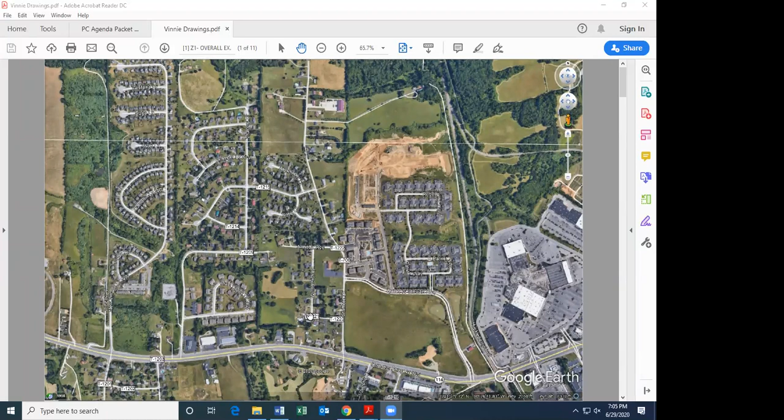What we have proposed is approximately 18 proposed lots that would be built as patio homes. Those are single story, single level living. Will, would you move to the next slide, please?

We'll move to the layout here in just a minute, a little bit better blow up of the site. Again you see the property here outlined in black, basically one gut of property off of Pepper's Ferry Road. Access on Vinnie is off of Stafford to the Carmel Heights subdivision and off of Walters Drive here to get into Slate Creek.

Next slide, please. This is just an existing condition, a little hard to see on the plan here, but this is a survey that we did for the applicants. Again there's Vinnie on the Slate Creek side, on the Carmel Heights side. You see there's an existing sanitary sewer line that runs through the property right here, comes down, jogs off on property right here. Drainage - currently the site kind of forms a bowl and flows in a northwesterly direction.

It's hard to see on this map, and I'll show you a better plat in a few slides, but there was a 50-foot access, ingress egress easement that was dedicated to the town of Christiansburg that connected the right of way on Vinnie here to the right of way here. You can see it noted.

There we go, right there. That was dedicated, I believe, in 2012, when some lots north of this that were owned by the current property owners were subdivided.

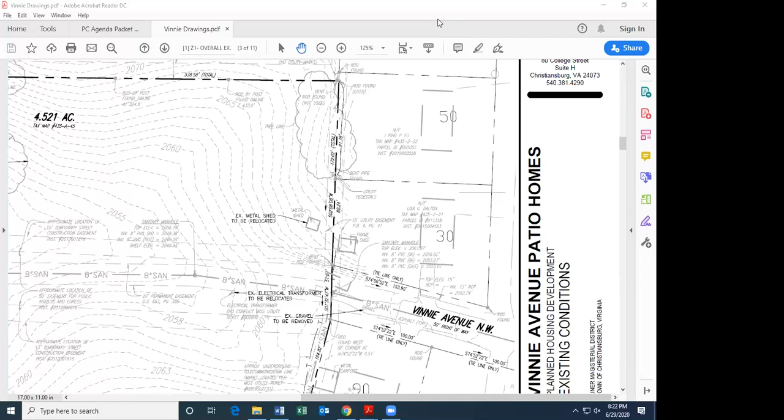And would you mind, Mr. Johnson, could you scroll through a couple more slides? I think it might be helpful for the commission to see. These are some of the building plans we've done for Wynwood, but we don't have to go through those — you guys have pictures of what the units look like built. The pictures are a lot prettier than our plans anyway. Maybe one more.

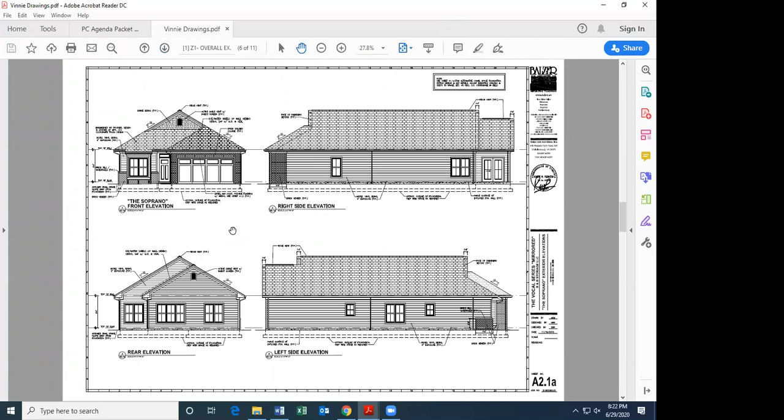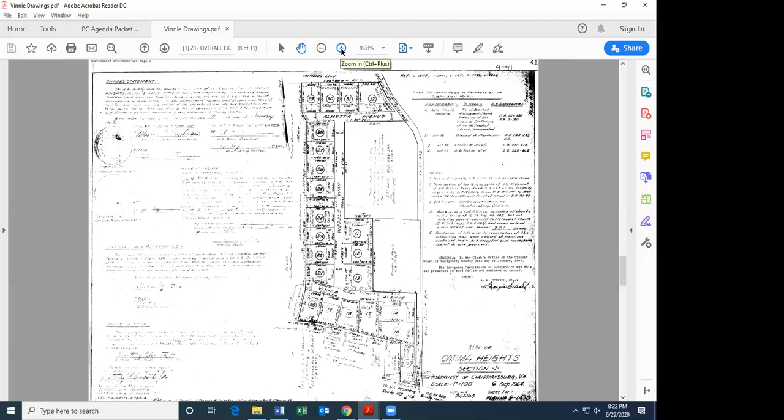So this is the plat tonight. This is the plat I was talking about earlier, from 1964. This is when Carma Heights was subdivided originally. Again, you can see Vinnie Avenue with that 50-foot right of way, and the property line there. Next one, Will. Again, this was the subdivision plat for Slate Creek, from 2004. So again, some of the comments about it being closed off, a suburb, whatever term was used, but basically an isolated community.

So a lot of times, if the idea is that you are not going to stub out to a future property, you have a cul-de-sac in. So again, you can see how Vinnie Avenue here was stubbed all the way out, full 50-foot right of way to that property, so that the intention of this connection was always there, from '64 to 2004, and then to 2012.

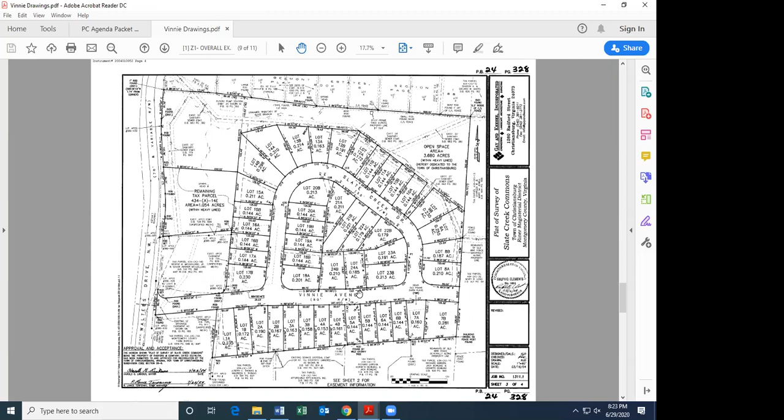And the next one, when the family that owns this property, part of this was subdivided back in 2012. That's when this 50-foot ingress easement was dedicated to the town of Christiansburg. So that 50 foot is exactly what it is, it was an ingress easement. It's now switching to a right of way with council.

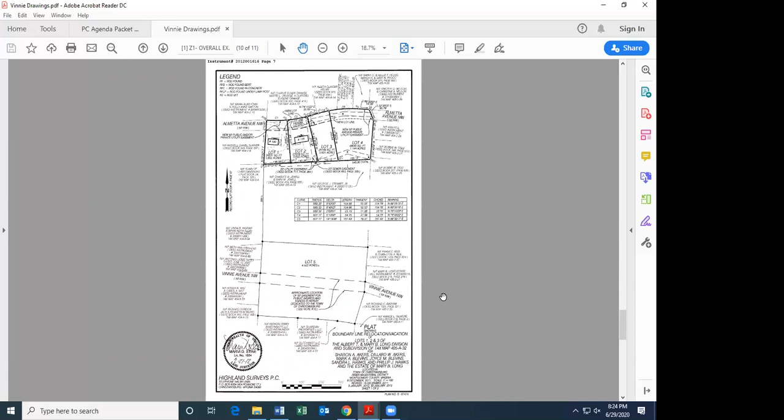So again, that connection has always been, since 1964, always planned to be a road connection in this property. There's been a lot of talk about runoff and stormwater, and that's what I'm kind of hung up on right now. Could you explain what the actual plan is to prevent it? Because you said the idea is not to have it any worse than we got there, but do you have any ideas of what you guys are looking at? So if you could just explain that a little bit more too.

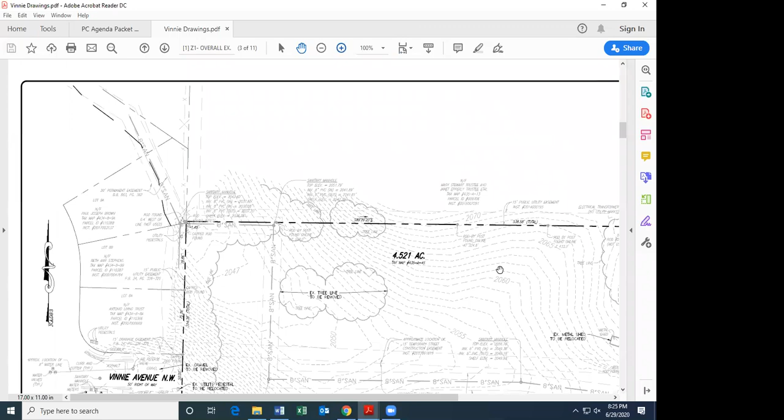So the issue that a lot of residents have in these older neighborhoods is nobody was required to do stormwater in 1964. Nobody was required to do stormwater when these developments up above the neighborhood went in. So all that runoff from these developments—I think I'll amend that, I think the storage buildings have a little stormwater management along State Road. But anything that falls off the back, there's no stormwater management right now.

Now you can see these contours are kind of faint. None of this property right now—everything's breaking this direction. None of this property is flowing onto her father's property. The flooding he's getting in the backyard is from his neighbors to the south, it's not from our property. So again, as this property is graded, you can see that's the topography line indicating the ditch line, that low point that goes right through the property and heads out to the northeast where it ties into Slate Creek.

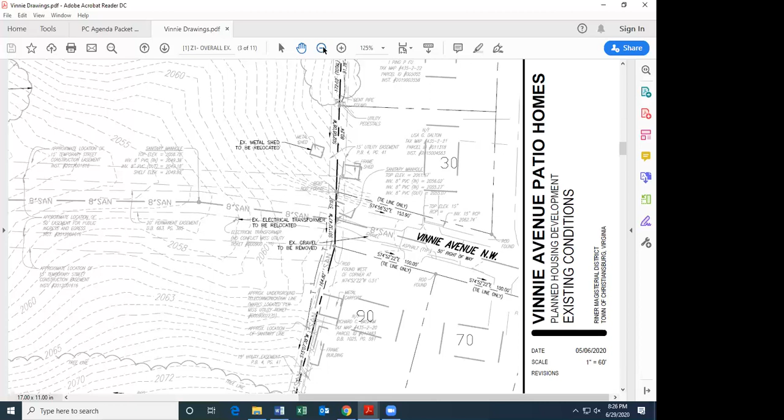So from a stormwater management perspective, we have to take into account all the water that's coming to us, not just our 4.5 acres. We have to take into account, when we do our pond, our stormwater management facility, all the water that's making it to that point of analysis, what we call our point of analysis. So where that is, if you can zoom out just a little bit, back to that corner. This entire drainage area coming off of this property—everything to the east of us, everything to the south and southeast, everything coming down this drainage area—we have to design for and account for in this pond right here.

So now we don't have to slow it down, we don't have to detain that water per se, but we have to account for it. So anything that's happening on Slate Creek—some of the problems these two gentlemen here in front of me have spoken about should get nothing but better.

So the idea would be this low point right here, you can see it, you can see how that topography is leaning towards this upper corner. The idea would be you do grading right here and start to dam up some of that with a pond in this area. Now, what we would want to do is back that off as much as we could and still not get into the sanitary sewer easement here. So we've got enough room to outfall the pond and spread out the water, as I was saying in my presentation, so we're not directing it in a hard channel right into the side of that bank where this gentleman was saying it's a little bit steeper. It's steeper on that side right there.

How steep is that, you said it was about—from your yard? From my yard, yes, it's about 6 foot, 6 to 10 feet, goes straight down or on an angle. You can hardly walk down.

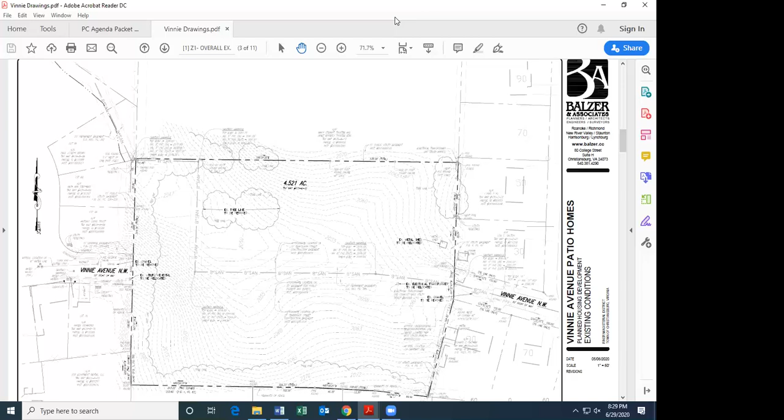So unfortunately for any developer upstream, whatever inadequacies may have been graded or done or not done when Slate Creek was built, we have to account for that now. If there's not an adequate channel downstream for us to tie into, that means it's more stringent on what our stormwater requirements are going to have to be on our site, because we can't let more water out that's going to either erode or eat out a channel and cause flooding issues, or prevent people's gutters from draining into that culvert. Okay, yeah, I understand.

I have some questions about sidewalks. You guys are going to be required to have sidewalks on both sides, correct? We've got one sidewalk proposed. So will it be on the right side or left side? On the north side, on the upper side, where we have less lots.

And then I know it was a beautiful, beautiful piece of land. I know the sunsets part of the property are just amazing. So I kind of understand where these neighbors are coming from, and I'm so sorry. This is going to be a very tough decision, no matter how you look at it, because somebody is going to be losing here—they're going to lose the views, they're going to lose a lot of the sense of nature out there.

I have another question, the trails. I know Soccer Farms has trails going through it and everything else. Are you guys within proximity to any of those trails? I don't see anything here. No, ma'am, we did talk about it—if there was a good place or reason to do a trail, we chose not to and instead extend the sidewalk down the road. That's where the logical pedestrian connectivity would be. I don't believe there's a trail system in Slate Creek that we would tie into. If there was, we would have made a connection into that.

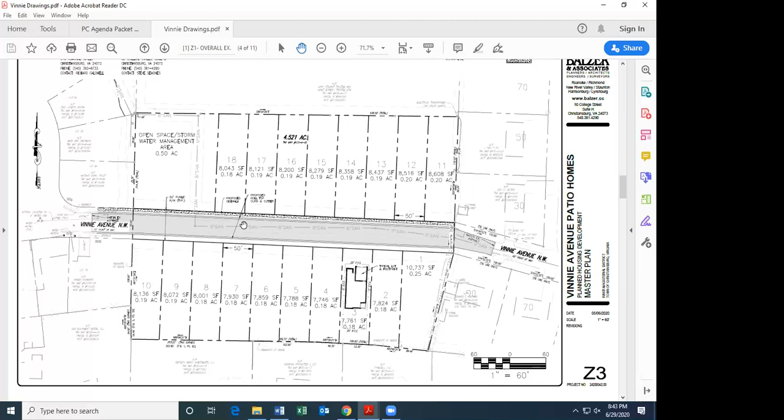The number of patio homes we've approved this year is astronomical. I understand we want affordable housing and things that look nice, but I don't want any more patio homes. I don't want any more townhouses in front of us. I want single family homes we can be proud of in Christiansburg. I think the patio home market is going to explode—we've approved way too many this year. The density back there needs to match more appropriately. Okay.

Could you jump back to the aerial for a minute? I wanted to touch on one thing before it slips my mind. There's been some talk about Stafford and how tight it is to make that turn. I wanted to remind the commission that with the approval of the Clifton Town Center project, part of that project is widening Stafford in this area. That whole section of Stafford Drive around Pepper's Ferry, back to Point Stewart, is going to get wider, so that will be improved.

I don't think our problem is with Stafford Drive, I think our biggest problem is with Vinnie Avenue. Some of the residents were saying that when you get out to Stafford, it's hard to make that turn. I understand what you're saying, it's narrow and you've got some sight distance issues. The thought was people would come all the way up Palmetto and come down, but this section of Stafford is going to be improved, so hopefully that intersection will be improved too, right?

Well, there's a lot of activity going through Fairmont, so the traffic isn't only going to go this way, some of it's going to go that way. The chances are Vinnie Avenue could be used a lot more than what you guys were talking about with the 100 cars per day, was that the number you said? For our development, yes ma'am. That's probably going to be multiplied by 3 or 5 times more, if not more.

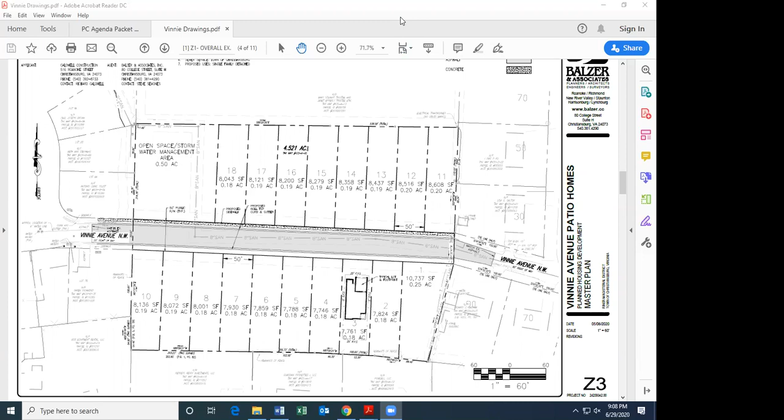I understood, and sorry, I think what I understood was you're gonna take a look at the setbacks. You're gonna take a look, I heard park benches mentioned for the first time, and I'd like to see what that area would really look like a little bit more. We talked about screening, we talked about retaining the wall potentially. I think there's a lot that we talked about, and I think we should give you guys an opportunity to come back and address some of the issues that were brought up tonight before we jump into a vote. And that's my opinion. I'll throw that out to the rest of the commissioners to see how they feel.

I agree with that. Same here. Mr. Johnson, just to that point, we would like that too. We made a commitment to the neighbors that we were not going to make any of the changes they asked us about until we had this meeting tonight. But we wanted to see what the planning commission had to say and other things that you guys wanted. So just to honor our commitment to the neighbors, that we would go back and look at these things, we would appreciate you waiting until the 20th.

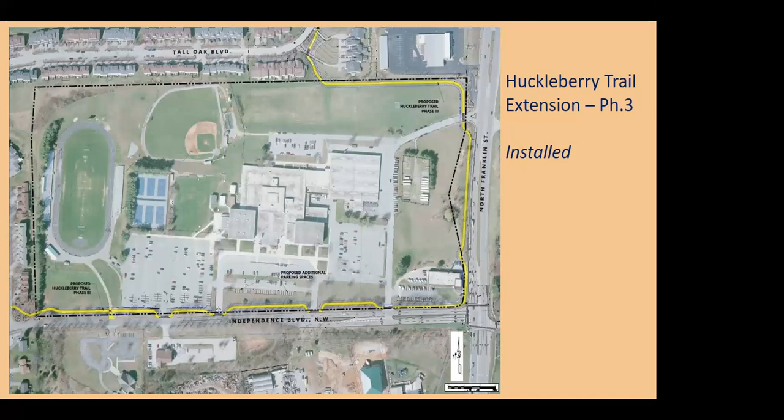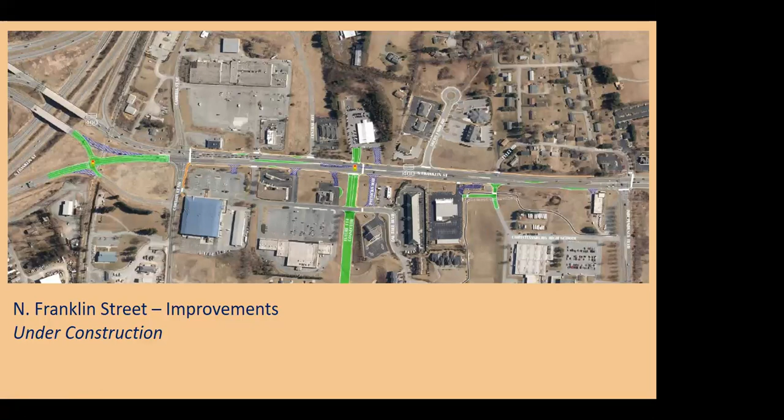You're on the next one. Am I on the wrong one? We talked about that — I was on the wrong slide, sorry. Construction is scheduled to begin, and that's already beginning. That was the last thing, I got ahead of myself. You put all the slides out of order. I had the old version. Yeah, same paper.

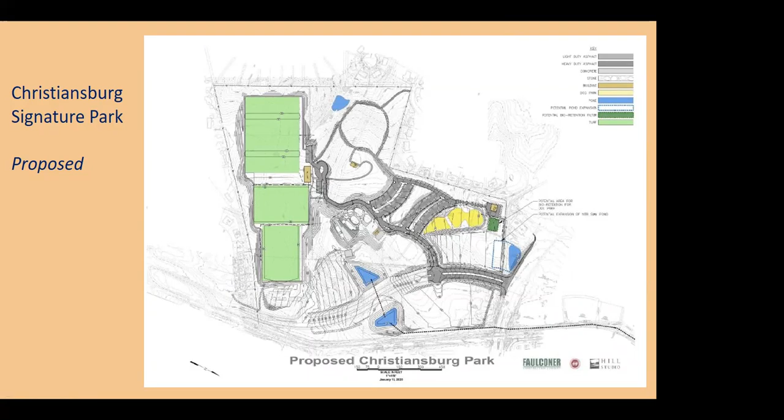It would utilize the newly installed pedestrian signal to connect the Huckleberry Trail to Independence through North Franklin, and then use the existing wide east shoulder of the bridge over Crab Creek to add additional sidewalks. Additional VDOT funding was submitted during last summer's cycle, and we're waiting to hear about it. Did we hear about it? I've not heard anything.

This idea has the trail, or wide sidewalk, essentially picking up where you have — this is the corner of the high school property right here. It would come down on the other side of Franklin Street, across the bridge, and then tie into the aquatic center, correct? Is there anything going toward Christiansburg Institute?

That's not part of this presentation, but our hope is that we can — you might have to go back to the Google Maps for that.

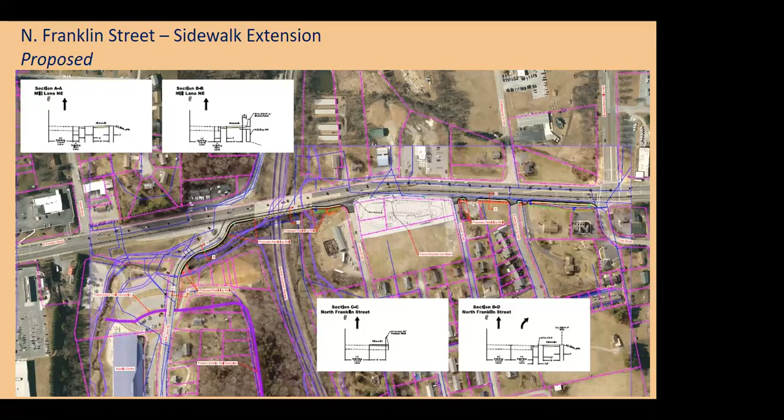It's kind of on the corner of that last one. And then, is this the Cambria Trail? Yes.

So the first phase would be a combination of 10-foot wide multi-use trails and 8-foot sidewalks that connect the aquatic center, which is the blue box, to Mill Lane and Cambria Square, initiating at the east-west trail system. This should take you through the proposed train station and then out to the corner where there's a sidewalk.

That'll be a great ride. It connects the Depot Park Trail project that should be completed by summer and the above North Franklin Street sidewalk project extension. And we also submitted an application for funding with VDOT on that, and I'm assuming we're still waiting to hear.

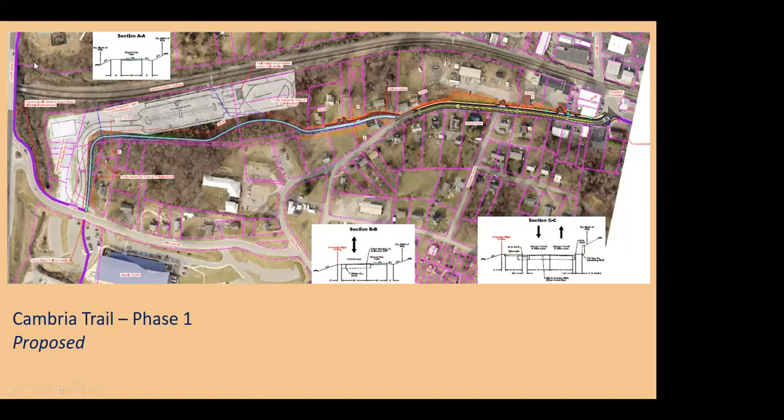The second phase of the project would begin at the terminus of Cambria Square and connect Roanoke Street to Kiwanis Park, partially utilizing an abandoned line of Norfolk Southern. We've talked about that for a long time in our committee. It's just a very flat roadbed. It would be very easy if we could drop the trail in there, and very cost effective.

Kiwanis has been working to develop; they acquired some additional property in between the ball fields and Roanoke Street, so there's an interest there. It would be more of a natural style trail, but there's potential down the road to tie into that, giving a further connection out to the baseball fields at Kiwanis Park. We also submitted an application for phase 2 of the trail.

Any questions? That was just a highlight. There are a lot of other projects happening in different pieces, done and not done, but those are the ones we chose to highlight for this presentation.

That was a really good presentation. Yeah, that was awesome, because I did a really good job with that.

Can I ask you one question? Do you guys have any pedestrian signal stuff going up on North Franklin Street on the other side by downtown, at the intersection with Cambria and North Franklin? Is there pedestrian crossing stuff at the Magic Street area or whatever? There isn't really a pedestrian crossing there to go from one side to the other, on the side where the subway is.